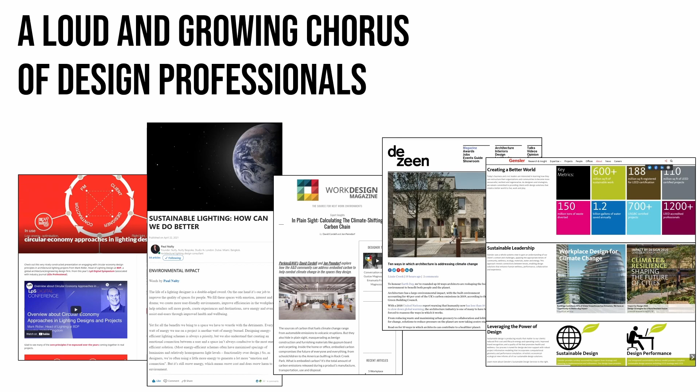For decades, we've heard leading minds warning of the imminent dangers of climate change. Finally, we're seeing the architecture and construction industry stepping up to address its negative impact on the environment. In lighting, we're looking beyond simple energy efficiency and starting to consider the holistic impacts of architectural lighting, from sourcing materials to production of fixtures to operating them to maintaining them and ultimately disposing of them. And this is really forcing both lighting manufacturers and lighting specifiers to consider their environmental impact.

But what we see is that the legacy lighting manufacturers are largely not acting. They remain frozen in the old ways of designing fixtures, producing them, and sourcing their supply chains.

So it's really going to fall on the lighting specification community to ask the tough questions, such as why do our lighting products use such energy-intensive materials? Why do they use so many toxic petrochemicals? Why don't project owners hold the lighting industry accountable for life cycle costs? And if we stop and consider for just a second, shouldn't sustainable design and manufacturing lead to radical cost reductions? Why do sustainable options continue to cost more than traditional products?

For the 15 years of the LED lighting revolution, the lighting industry has largely been fixated on two metrics: lumens per watt efficacy and cost reductions. And that's led to rampant greenwashing in the industry.

William McDonough is the author of the Cradle to Cradle standards, and I love his philosophy that striving for zero is not a noble goal. The problem in most industries is they've been on a sort of less-bad trajectory, trying to reduce their impacts to nothing, as opposed to striving to create positive impacts on our planet and ecosystems.

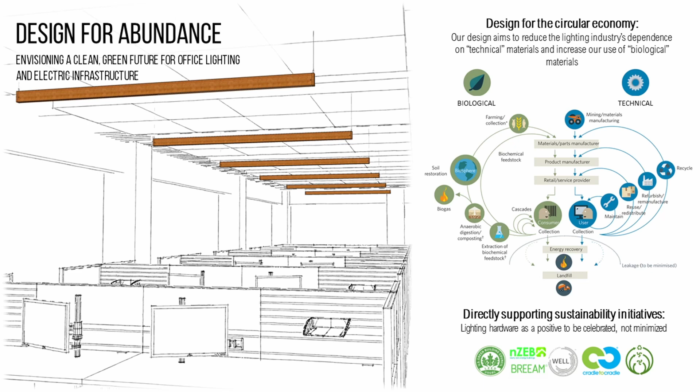And what I did is looked at the separation of technical and biological materials and really said, why do we need so many technical materials in a standard lighting fixture? Why can't we push more of the material content towards biological, where it takes far less energy to produce and recycle these materials? It has brought up a very interesting problem I've had over the years in product development.

In talking to well-intentioned engineers who've argued with me over materials, generally they've said that aluminum is a perfect circular economy material. It is durable, it can be recycled endlessly without degrading, whereas wood, every time you process it, degrades. It's very hard to argue with this, but it never felt right until I started to address the supply chains.

I started to challenge people to say, would you want to live next to any part of that supply chain? In the case of aluminum, would you want to live next to open pit mines? Would you want to live next to smelting facilities? Would you want to live downwind of a petrochemical cracking plant for that powder coat paint, or downstream of an anodization plant? And I think the answer is pretty clear: no. No one wants to live next to any part of that supply chain.

Whereas with biomaterials, it's generally the opposite. Would you want to live next to a forest or a wood shop, or a farmer's field where the products are decomposed at the end of life?

And I think generally people have no problems living with that. And in fact, many of those are considered benefits to society.

So I chose bamboo for the main body of the fixture. It's a quick-growing grass with lightweight harvesting and processing, so it actually sequesters carbon in its mass. It's very good with fire rating, and it's strong, straight, and true. So it can largely stand in for many of the properties people want in aluminum extrusions.

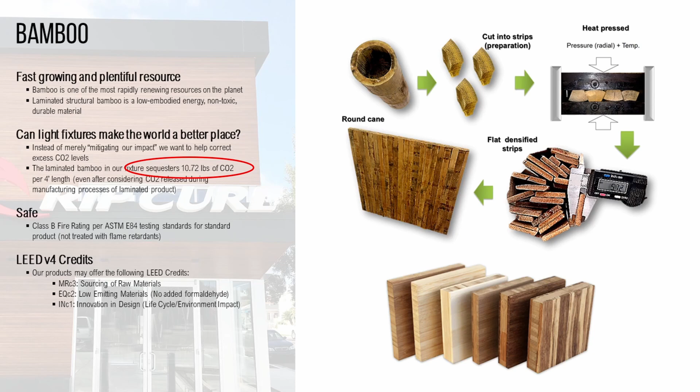I then found a startup company in London making bio-based circuit boards produced from flax waste products, and flax is what's used to produce linen. So instead of nasty petrochemical cracking plants used to produce the epoxies and substrates for circuit boards, our supply chain is a flax field in bloom in the south of France.

The next concept looks at what adds value to the fixture design. This is the lean philosophy of looking at value-add versus waste. In an electric lighting fixture, the core value-add is converting electrons to photons. We have these magical little things called LED chips that do this with unprecedented efficacy in incredibly small size.

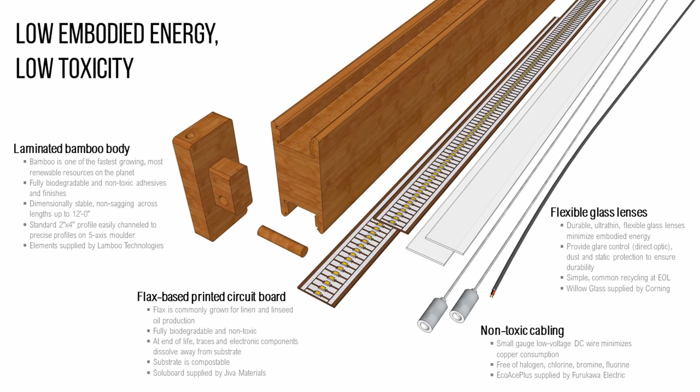So really, that's the only thing adding value in an electric lighting fixture. Now we have a few other requirements—we have to give structure, we have to support those LED chips. You might have other value-adding requirements, such as providing architectural decoration or presence. But in general, there's a lot of stuff in a modern LED lighting fixture that is just waste, which we could simply eliminate with a bit of smart design.

So then we looked at how do we assemble this, and how do we disassemble the fixture at end of life? We chose a design where you can bang out a wood dowel, take the end cap off, and then the LED board and the glass slide out.

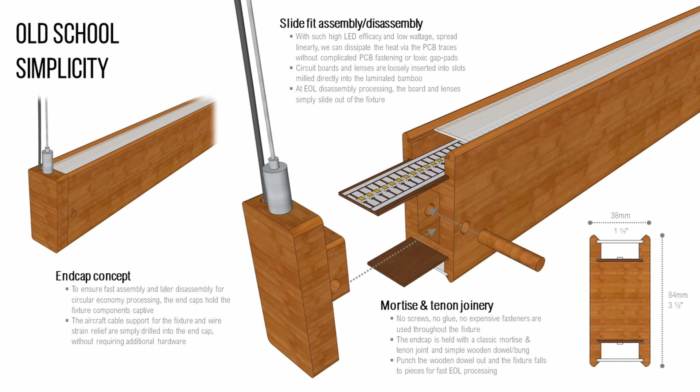So the wood can simply be composted, the glass can be easily recycled through any local recycling stream, and the LED board could be repurposed for several more generations of life cycle because it's starting at such a high efficacy to begin with. Then at end of life, the LED board itself can simply be soaked in water, the electronics scraped off, and the bulk of it, the board itself, can be composted. We think in the end it provides a beautiful architectural presence, bringing some biophilic design through a natural material into a space.

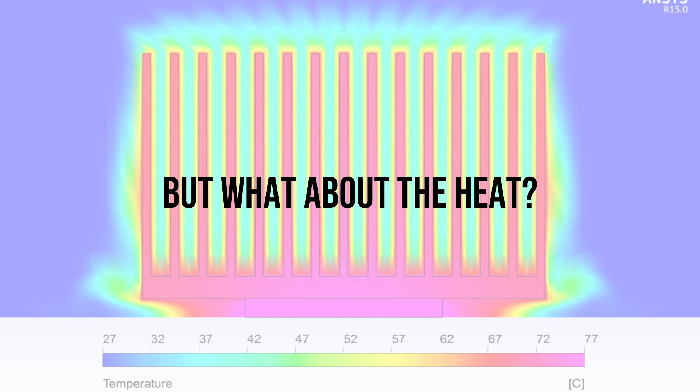When either specifiers or manufacturers see this design, usually the first question I get asked is, but what about the heat? Everybody's been trained that LEDs produce heat, and it needs to be removed to keep them cool and operating with high efficacy. But the thing is, today we have LEDs available at 230 lumens per watt efficacy off the shelf.

This is not pie-in-the-sky roadmaps and predictions of future efficacy. This is actually available today in quantity at low cost. And that's 23 times the efficacy of an old-fashioned incandescent bulb. It's available in such small form factors, half a millimeter square—we're talking literally grains of sand size light sources.

So we have these incredible magical little devices that add the key value to the fixture. In most linear or planar formats, we've spread the light source out over such a large area, and we're restricted due to energy codes to such low wattage per area. In a linear fixture such as this, you're talking 3 to 4 watts per linear foot. You can dissipate that thermal load in free air with no heat sink, and you can mount it into various biomaterial substrates, keeping the efficacy plenty high and the lifetime plenty long.

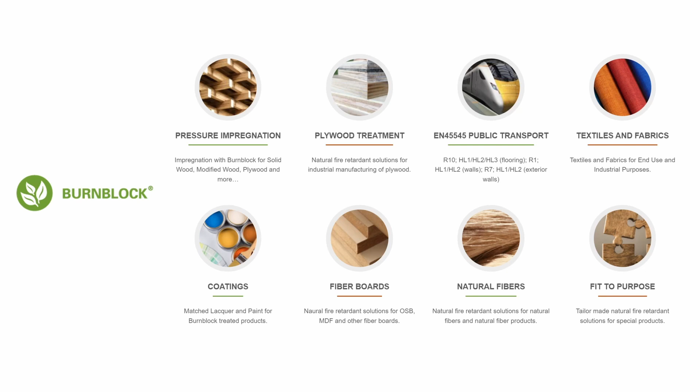Then usually the second question I get is, but what about the fire rating? You're using wood—ooh, wood, how dangerous is that? Well, first off, most biomaterials can easily be flame-proofed nowadays with bio-based, totally non-toxic flame retardants. And many natural materials are available that are inherently flame resistant or totally non-flammable. I'm a bit saddened that when we show natural materials, the first gut reaction is somehow that they're dangerous.

All of this adds up to a new revolution awaiting us in LED lighting fixtures. We already went through the LED revolution for the past 20 years. Now I think the focus is going to turn to really innovative uses of bio-derived materials.

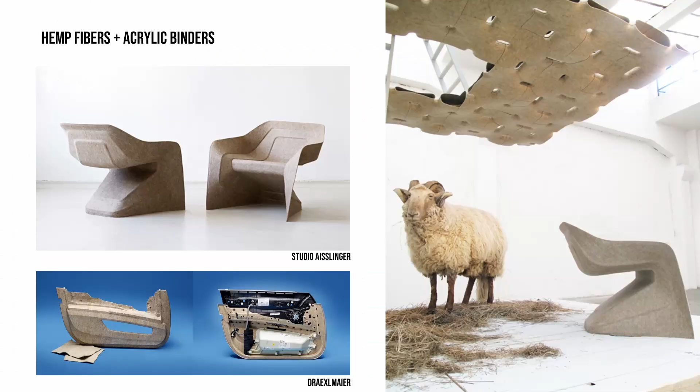We're seeing all sorts of academic and small startups investigating all new types of biomaterials, from agricultural waste streams to fast growth carbon sequestering sources, and really fun things like e-textiles and dissolvable electronics. It's just a very rich, innovative area. And we're going to see some amazing new design concepts and fresh new looks coming out of this material research.

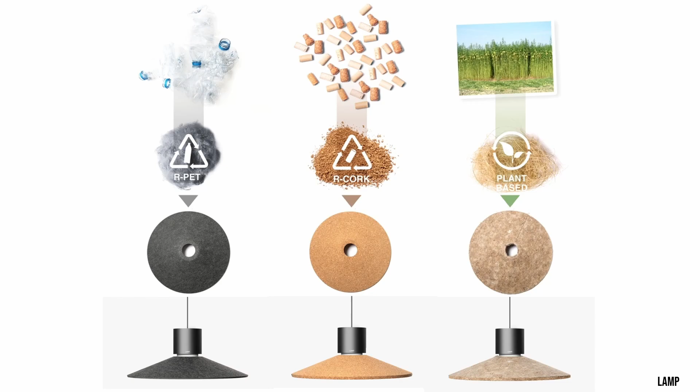This research is really driving the lighting industry to move beyond tired old linear extrusions and sheet metal boxes. We're also going to see a revolution in product marketing where manufacturers really detail the source of the raw materials, how it's processed, what it looks like, what its life cycle will be, and give specifiers the choice in those components. This, for example, is a Spanish manufacturer named Lamp, really beautiful product marketing around material selections. I think we're going to see a lot more of this in the very near future.

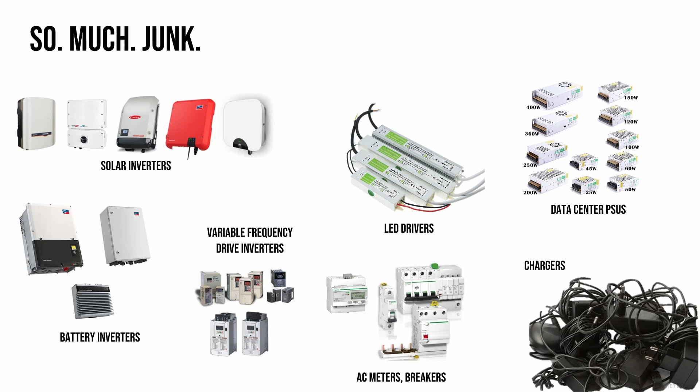The next question I usually get asked is, what about the electronics? For sure, in modern architectural construction, we are simply drowning in electronics junk. We've loaded up buildings with so many various electronics pieces throughout. It is really difficult to manage. And frankly, there is a very poor story about recycling electronics or converting electronics into a more friendly circular economy approach. I think, though, that the future for lighting has a different tack.

We can't eliminate electronics for sure, but we can dramatically reduce the amount of electronics in our lighting systems. And this is going to come because of DC power.

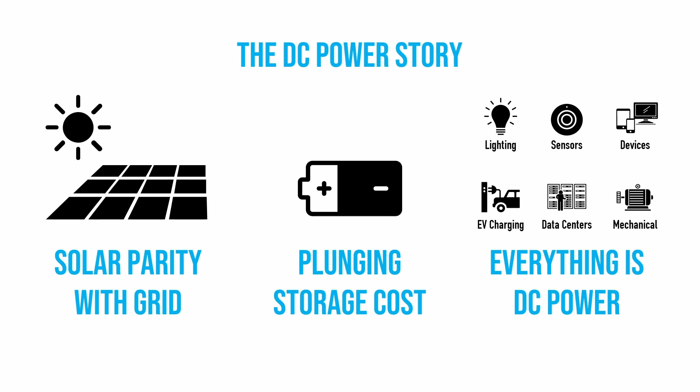In modern buildings, we have three new realities. First off, building owners can pull electricity from solar panels on their roofs cheaper than they can pull electricity from the grid. They can then save that electricity in ever decreasing costs of storage, and everything in a modern building is already DC power. When you look at large projects like covering the roof of an IKEA or a Target store with acres and acres of solar photovoltaics and trying to be an off-the-grid net zero building project, these small changes in efficacy and these small changes in system costs equal massive cost savings for these large customers.

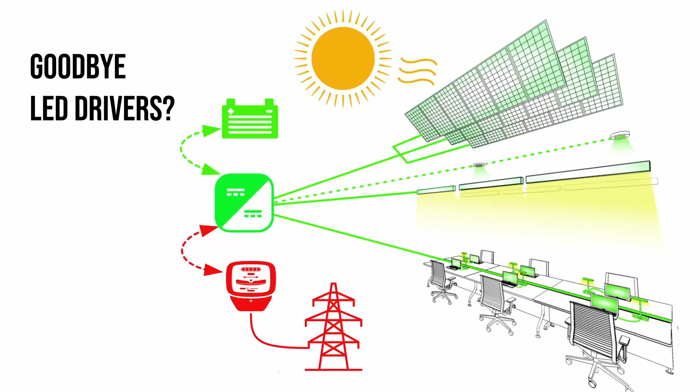So what we're going to see is a future where we want to take the DC power generated directly from the PV panels on the roof and efficiently funnel that into our LED products with the least number of conversions. We're going to keep it all DC, and we're going to use ever more efficient electronics components that are miniaturized, solid state fault interruption, solid state current control. The power supply itself will go through a revolution.

And I think within the next decade, we're going to see that the overall amount of electronics in architectural construction is reduced by a factor of 10 by going to these DC native systems. In many ways, for lighting specifiers, it's going to feel a bit old school at first. You're going to go towards more and more remote drivers, sort of centralized dimming racks. We're going to take the electronics out of the fixtures, and they're going to become centralized and miniaturized.

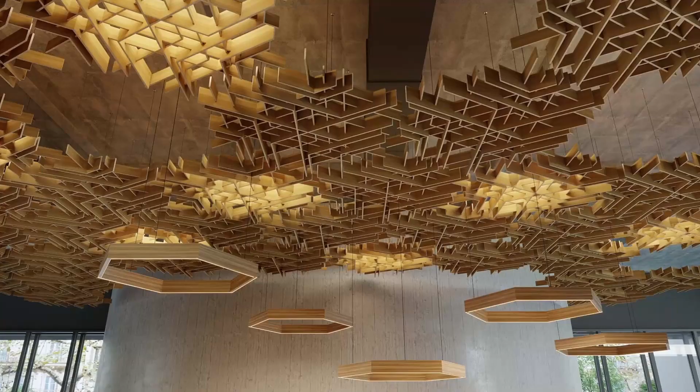So as a specifier, what concrete steps can you take today to start this sustainable revolution in lighting? First off, there's tons of products already on the market that use wood and natural materials, ceiling systems, lighting systems, sort of hybrids of lighting and ceilings. And that's just a great place to get started. I would also start putting pressure on your lighting reps, your lighting salespeople, your lighting manufacturers to keep this conversation going.

So let's play a little game called Stump a Salesperson. The next time a salesperson comes into your office with a new lighting fixture, simply challenge them to send you a list of all the substances used in the fixture by weight. Sadly, this is so uncommon in the lighting industry that the salesperson will probably go running back to the product team, which will then go running back to the engineering team. And at best, they'll be able to deliver you an engineering bill of materials, which does not actually list all the substances in the fixture.

That's where we have to get started. We have to press lighting manufacturers to stop and put the effort into understanding what exactly they are putting in these fixtures. And then as specifiers, we have to start learning what is available to us as options in terms of various types of toxic materials or non-toxic materials or energy-intensive materials or more eco-friendly materials.

And then as the bonus round, you might challenge them to give you an environmental product declaration for the fixture. EPDs are far more holistic. They look at the complete impacts of the supply chain, the complete impacts of the life cycle of the fixture. But they are very intensive and very difficult documents to build.

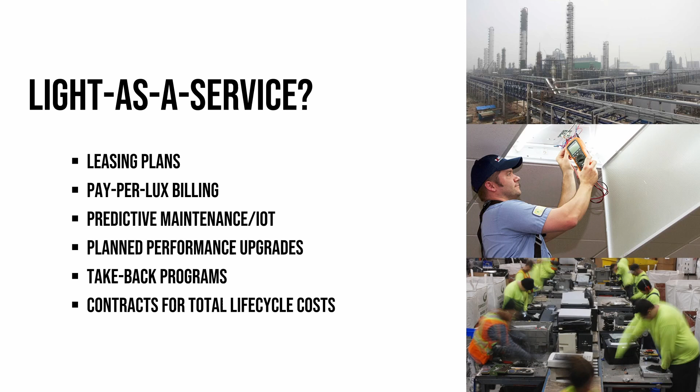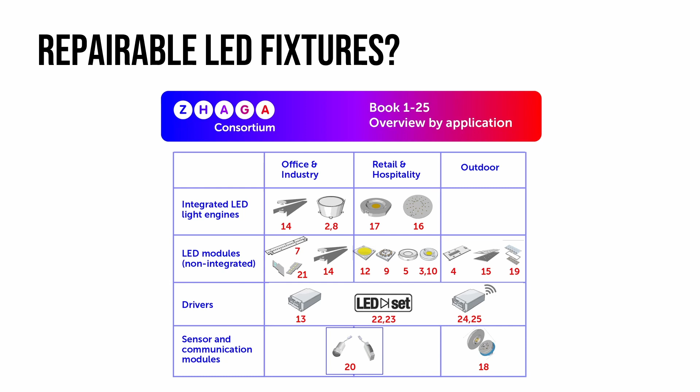Another challenge to think about is simply repairable LED fixtures. The Zhaga standard has been around since 2010, and it is really quite sad that lighting manufacturers did not embrace this. They've been pinching pennies and avoiding modularity, and they've produced fixtures that are disposable junk, basically. You as a lighting specifier can certainly put this down in your boilerplate or look for fixtures that include Zhaga. Challenge your salespeople: is this module in this fixture a Zhaga standard? Talk to them about it. As specifiers, you hold tremendous discretion in what you put onto these projects.

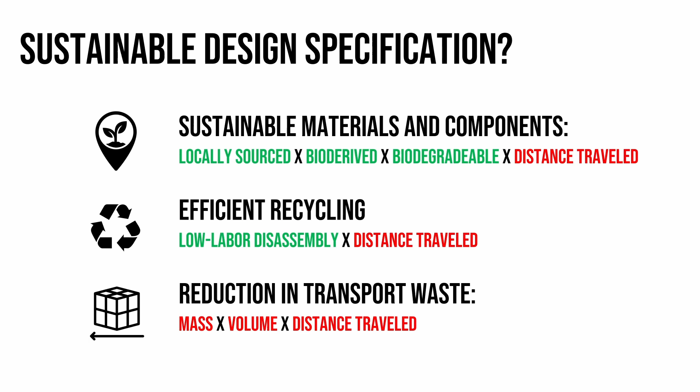I would implore you, don't wait for all of these sustainable standards to come online and for manufacturers to support them in terms of the full product marketing. Just start. Look at these products and in your mind, look at the quantity of materials in them. Do they have any sustainable materials? Give them mental bonus points for being locally sourced or bioderived or biodegradable. Deduct mental points for the distance traveled for these materials. Look at efficient recycling, hold the fixture. Is it obvious that it could be easily disassembled at end of life, 15 years from now? Can it be disassembled and put into local recycling streams, or would it have to be sent far for a disassembly process? Just look at the overall reduction in transport waste from original production to end of life - mass times volume times distance traveled - any of those you want to penalize.

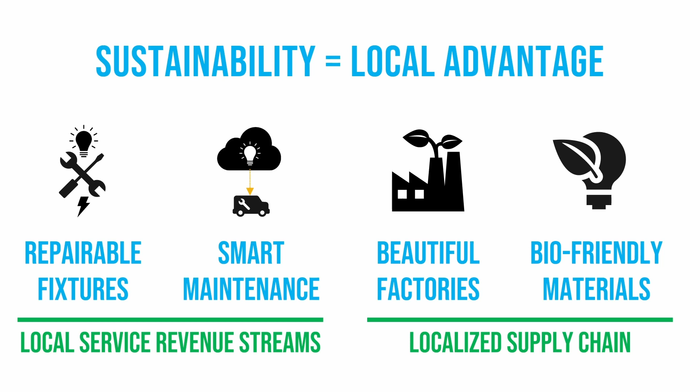There's another huge benefit to sustainability, and that's creating a sort of local economic advantage. If you have repairable fixtures that local maintenance people can go and actually service, you have smart maintenance programs, you have beautiful factories that can be co-located in residential neighborhoods. You have bio-friendly materials that will be non-toxic in their initial production, non-toxic in their disposal. You create local revenue streams, you create a localized supply chain, you keep this stuff tied to the neighborhood. And we collectively as an industry have to challenge ourselves: what future are we specifying today? Are we proud of what we're specifying? Are we proud of the future that we're creating?

If you're just starting your own journey into the circular economy, I recommend starting with the Ellen MacArthur Foundation. It provides a lot of the basic jargon and lingo around circular economy practices. And check out Bill McDonough - he's a fantastic speaker, very inspirational. He has a brilliant way of tying economic benefit to sustainable practices. If you're looking to actually implement sustainability on your lighting specifications, look at Building Transparency, which was an effort started by Skanska, the International Living Future Institute, which is the Declare Label program, and there's a variety of other support groups in carbon reduction, non-toxic materials, and so on.

So I leave you with this: you hold the keys to the future today. Don't wait. Please get started. Thanks.